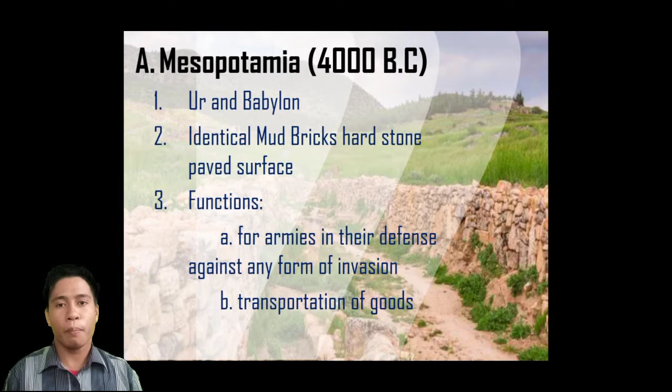Another ancient constructed road was discovered in the land of Glastonbury, England, where timber works were more prominent than rammed earth surfaces. This was in line with their transportation of goods and distribution of products in the community. However, the Romans were the very first people to discover and use cement in paving roads.

Early engineers built many miles of roads, bridges, and highways that brought much needed development, while wheeled vehicles began to rise and standardize human activities and lifestyles. These early engineers didn't only build many miles of roads, bridges, and highways, but also contributed to the development of highway and road paving.

Let's start in the 18th century with John Metcalfe, in 1717, who built many miles of roads and bridges and highways in Yorkshire, England. He proposed only three components of road materials: first, at the bottom layer, large stones; on the middle layer, a mixture of road materials; and at the top layer, gravel.

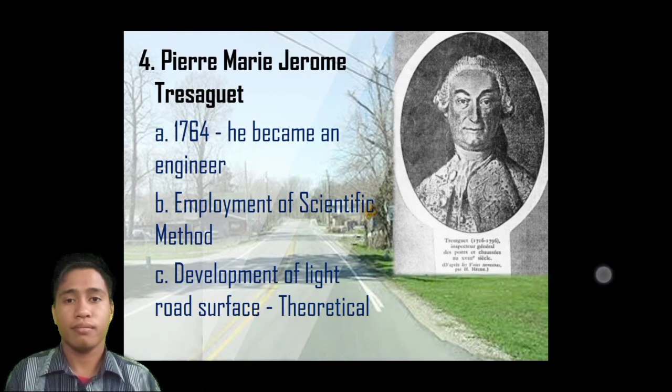Now, let's move on to the importance and significance of roads and highways in urban and rural areas. The importance as a medium or channel is that one can travel on ground from one place to the other, which we can use roads and highways for.

Second is monetary and time cost reduction. As roads give us access to many different villages and cities that connect and bind each other, we can now easily reduce the monetary and time costs of traveling. We can now go from one place to the other.

Highways and roads also act as linkages, linking villages to villages, cities to cities, cities to villages, or vice versa. It creates a bound relationship between how cities and villages relate to each other. It also connects, or is also a network, as roads are connecting networks of different cities.

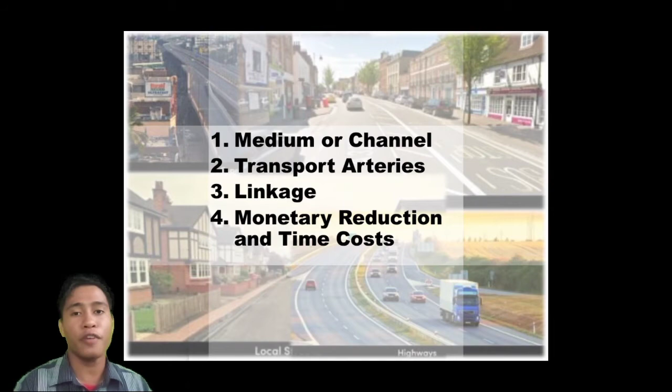Transport arteries play a vital and critical role in society, performing various key tasks. One example is the transportation of goods or products of farmlands to the markets. Secondly, the distribution of goods to and from the distribution centers.

Let's now move on with the different types of roads and highways. Road types are classified based on its functions. First is based on materials used. We have earthen roads, gravel roads, kankar roads, murram roads, water-bound macadam or WBM roads, bituminous roads, and concrete roads. Let's further discuss the differences of these materials used in defining road types.

First is the earthen roads. From the word itself, earthen, we can assume that earthen roads are rammed earth roads, or the surface of the earth itself. Second, the gravel roads. Gravel roads are compacted mixtures of gravel. We can also say that the main composite of gravel roads are gravels or broken stones.

Thirdly is the kankar road. Kankar, from India, means impure forms of limestone. This is good for an environment that has good quality lime.

Fourth, we have the murram roads. Murram roads are more dense than gravel roads, which we can say makes them better than gravel roads. Fifth, water-bound macadam or WBM roads, which is a composite of crushed stone aggregates.

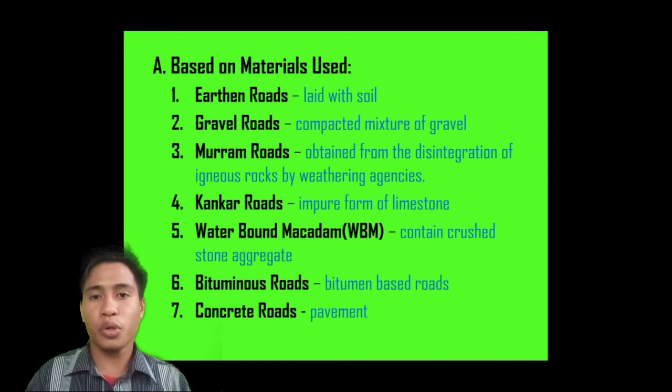Sixth is the bituminous roads. From the word itself, bituminous, it is a bitumen-based or tar-based road. Lastly, number seven, the concrete roads, which we are employing right now nowadays.

Let's now move on to the types of roads based on location and function. First, we have national highways. Second, state highways. Third, district roads. And lastly, rural roads or village roads.

Let me further discuss the national highways, the state highways, the district roads, and rural or village roads. First, the national highways. As it says national, it is only within the capital region of the country. In Metro Manila here in the Philippines, we can say that the roads are national roads because it is within the capital region of the country.

Second, the state highways. As it says state, all of the roads within the states are called state highways, whether in the national or capital region, or in other district regions. We can say that it is state highways.

Third, we have district roads. District roads connect cities to the markets and markets to the cities, or vice versa. Lastly, we have rural roads or village roads. Village roads connect villages to villages, or villages to cities and vice versa.

Next, types of roads based on traffic volume: we have light traffic roads, medium traffic roads, and high traffic roads.

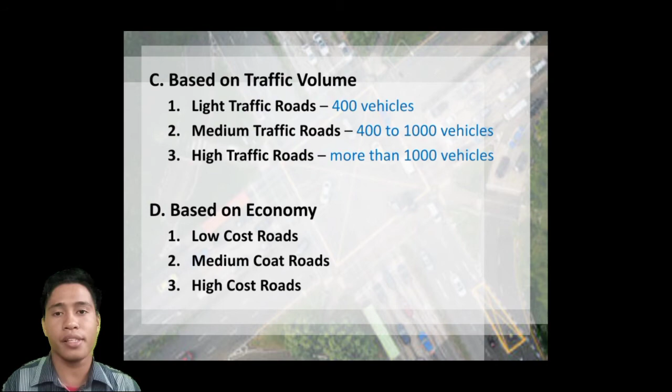Next, types of roads and highways based on economy: we have low cost roads, medium cost roads, and high cost roads. This economy basis also depends on the location and function of the road.

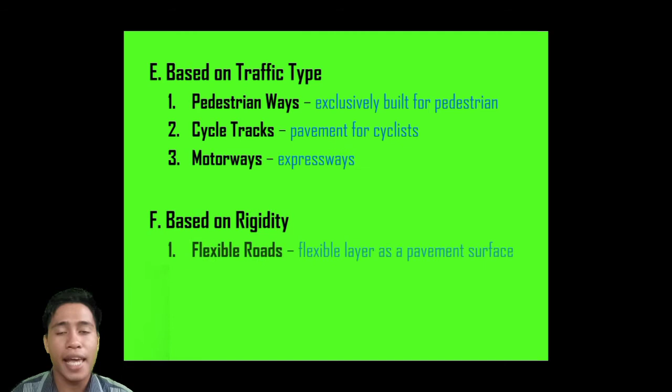Next is based on traffic types. We have pedestrian ways, cycle tracks, and motorways. Pedestrian ways, as the name suggests, are exclusively built for pedestrians. Cycle tracks are roads good for cyclists, and motorways are the controlled, most accessible, and quickest roads for the farthest travel.

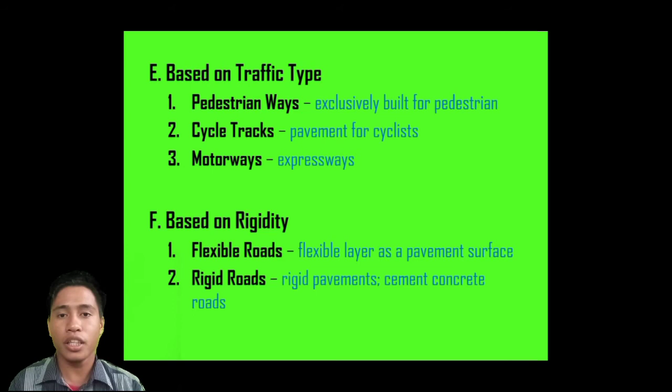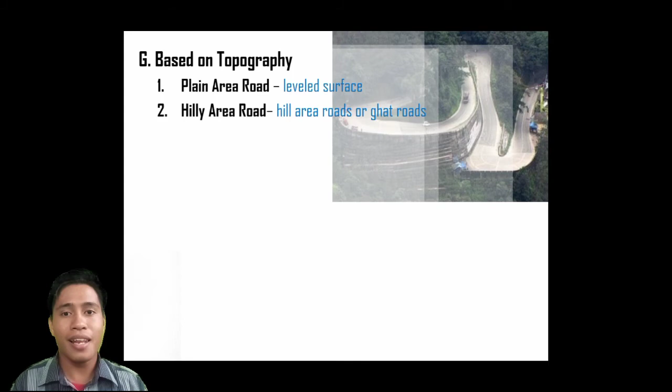Next is based on topography. We have only two topographical approaches of lands: the hilly area and the plain area. In plain areas, the surfaces are level. In hilly areas, we can easily observe hilly roads, or hill roads, or ghat roads.

Based on speed and accessibility, we have freeways, expressways, highways, arterials, local streets, and collector roads.

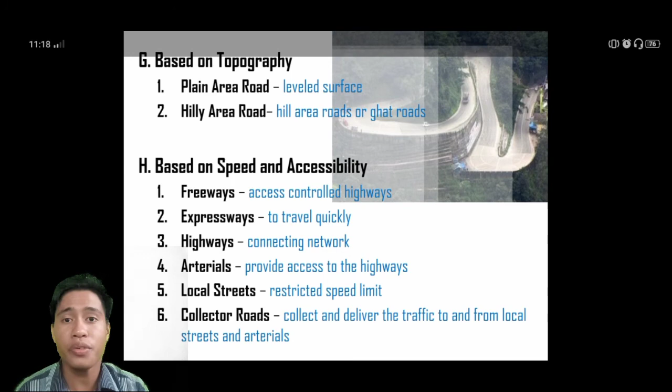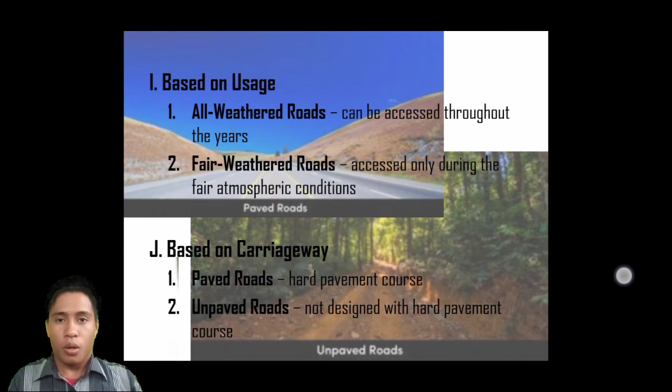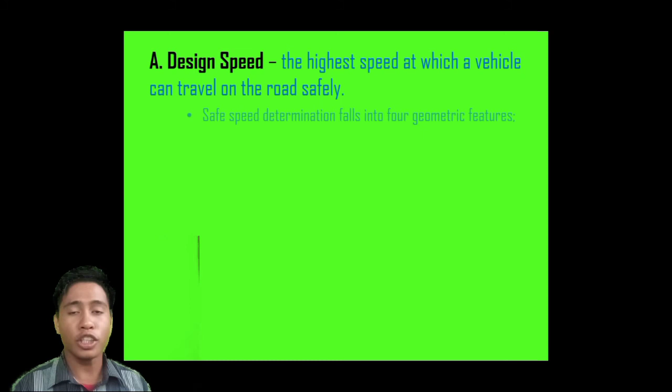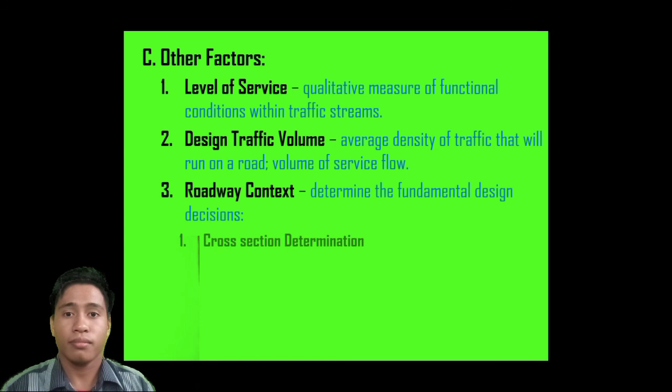Let's now move on with the various factors that an engineer considers in designing geometric roads. In actual design, we only consider two main factors: the topographical factor and the speed design factor. We also consider other factors such as level of service, traffic volume, roadway context, sight distance, and safety.